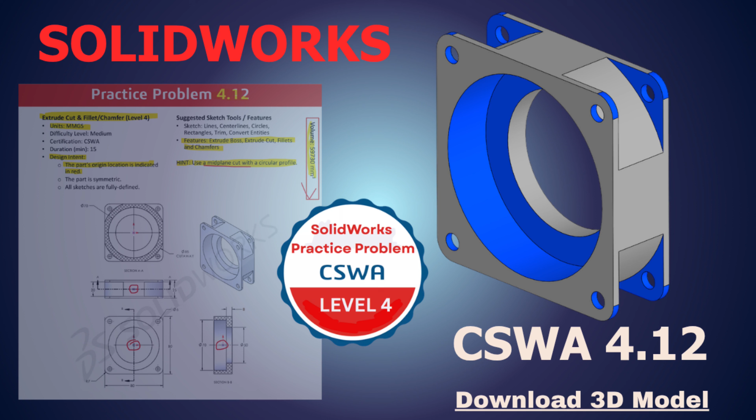In this video, we're working through CSWA Practice Level 4, Assignment 4.12. We'll focus on a combination of Extruded Boss, Extruded Cut, and Fillet features, so it's a great exercise to reinforce core modeling skills. We're working in MMGS units, millimeters, and one important detail before we start: the origin is located at the center of the part, so keep that in mind while sketching.

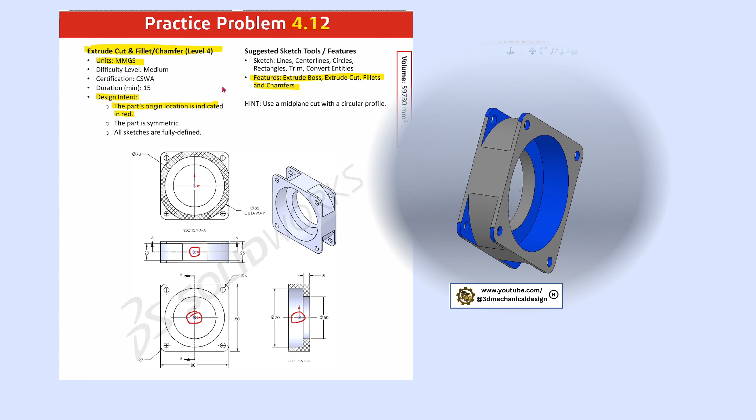We'll be using a few core features here: Extruded Boss, Extruded Cut, and Fillet. Quick tip before we start: the exercise suggests using a midplane cut with a circular profile. Once the part is complete, don't forget to verify your result by checking the volume. It should come out to 59,730 cubic millimeters. Alright, let's jump into SolidWorks.

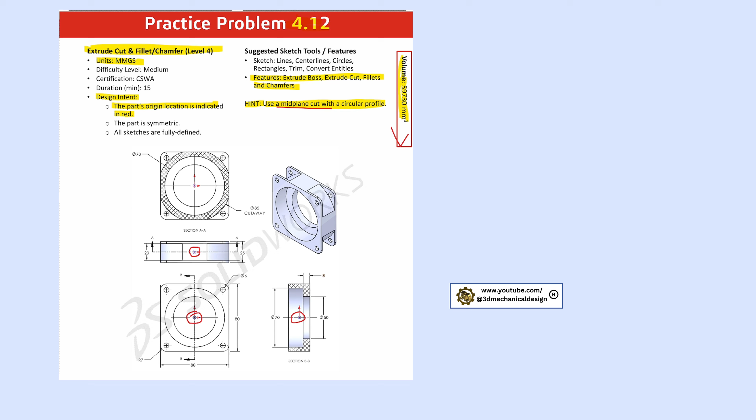Start by selecting the front plane and create a new sketch. Draw two concentric circles with diameters of 60 millimeters and 85 millimeters. Then sketch an 80 by 80 millimeter square centered at the origin.

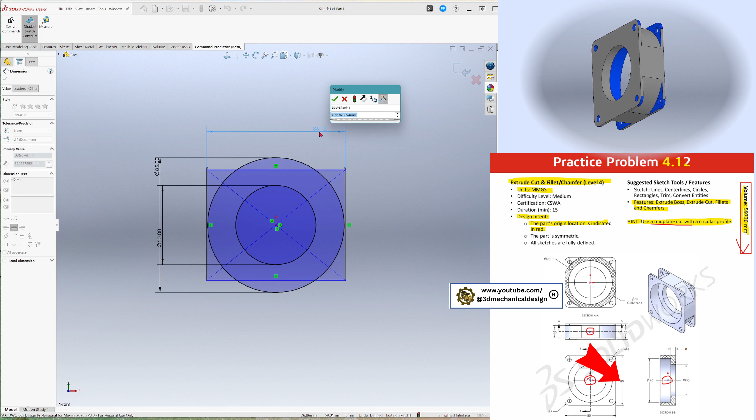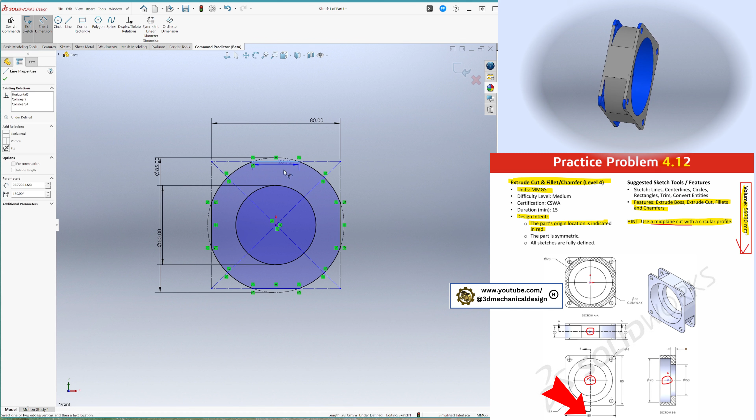Use the trim tool to clean up the geometry and remove the unnecessary segments. Once the sketch is ready, go to Features, Extruded Boss. Choose midplane and set the thickness to 25 millimeters. Confirm the feature.

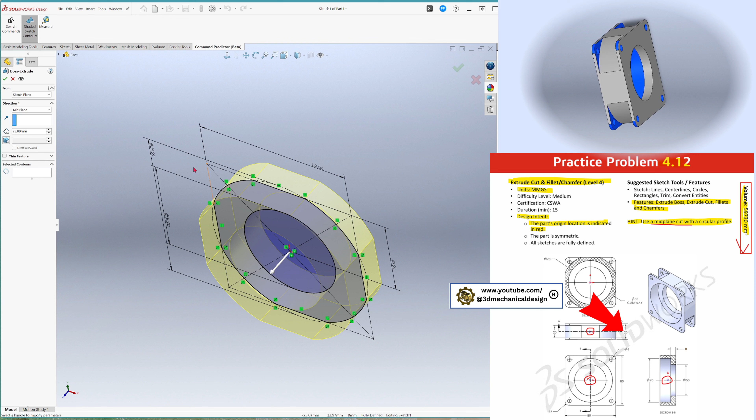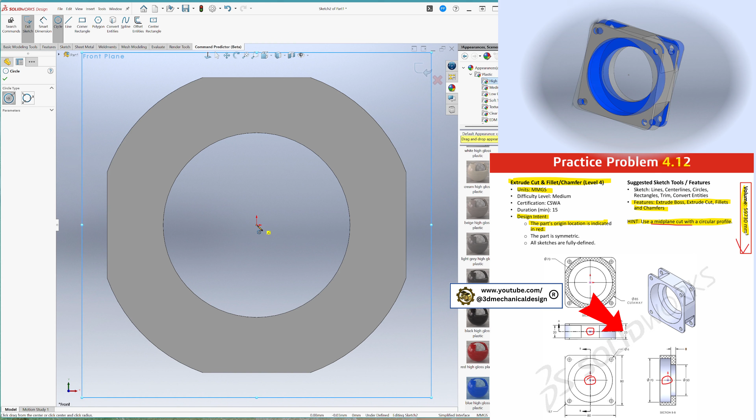Next, select the front plane again and start a new sketch. Draw a circle with a 70 millimeter diameter. Now apply an extruded cut. In one direction, set the depth to 4.5 millimeters.

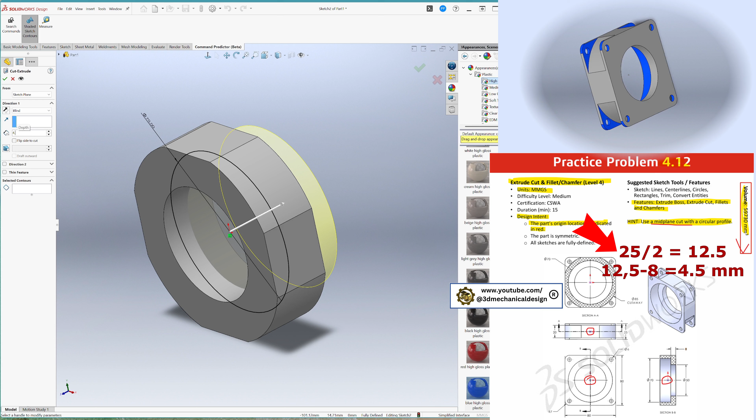In the opposite direction, use Through All. This approach ensures the cut behaves exactly as required from the drawing. Confirm the cut. At this stage, the basic shape is complete. Now all we have to do is add the flanges to finish the model.

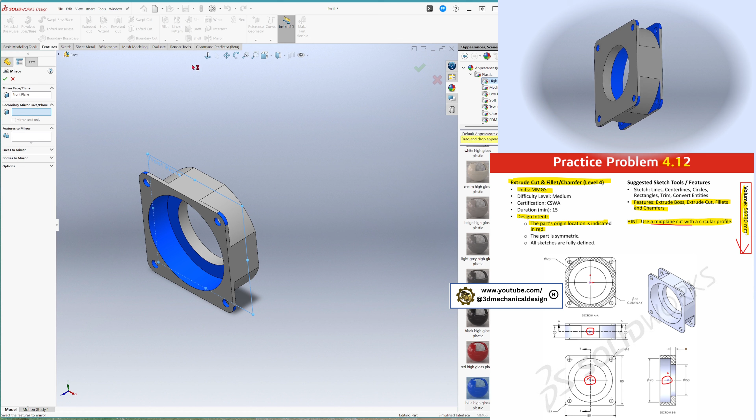Alright, the model is complete. Let's verify it. Go to Evaluate, Mass Properties and check the volume. You should get 59,730 cubic millimeters. Our value matches the drawing, which means we have correctly modeled the part according to the drawing.